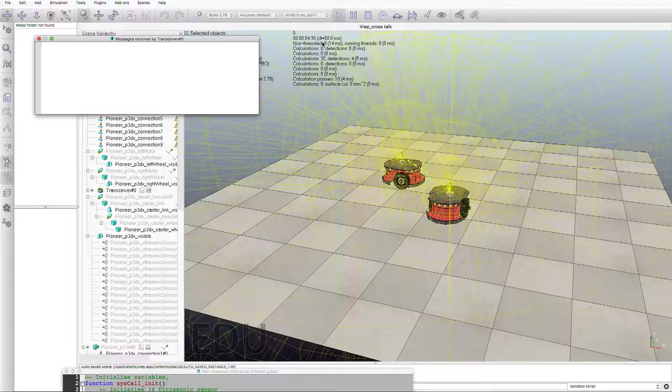There you are. There you are, that is the fun element. You can see that both the vehicles have dropped out of the screen, and that is the fun part.

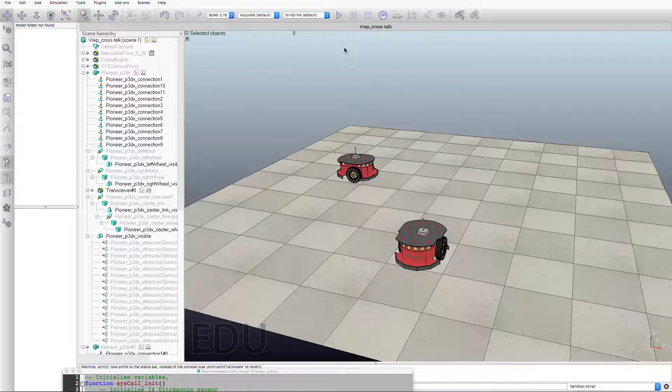So you saw that nice demonstration in a simulation environment. It was quite hilarious. The two-wheeled robots that you saw on either side just dropped off the platform. Clearly those situations were not handled in the simulator, and often it should not happen that when you put your algorithms in place, these autonomous cars should just drop off, go off the road, or drop off a cliff. So that is where the real trick is: how do you plan everything for your vehicle so that it moves in a coherent manner and is able to reach its destination.

So if you have seen the demonstration, you may also be wondering what that simulator is, and what it is doing.

So for that, I wanted you to get introduced to this simulation environment simulator called VREP. VREP stands for Virtual Robot Experimentation Platform, and this is essentially from a company called Coppelia Robotics.

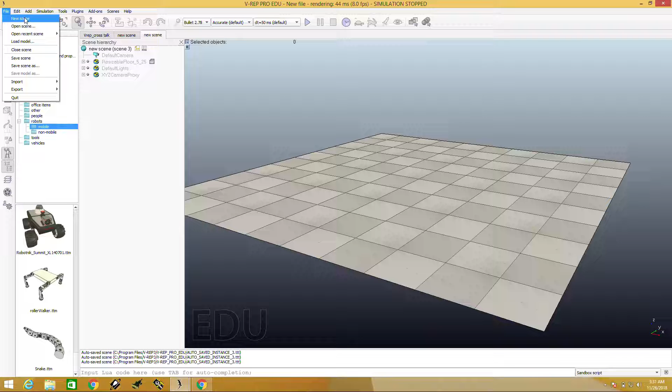So I am assuming that this screen you will get soon after you install it on your laptop, and all of that is set. Now what I suggest is you should first go and take a new sort of a scene, take a new scene.

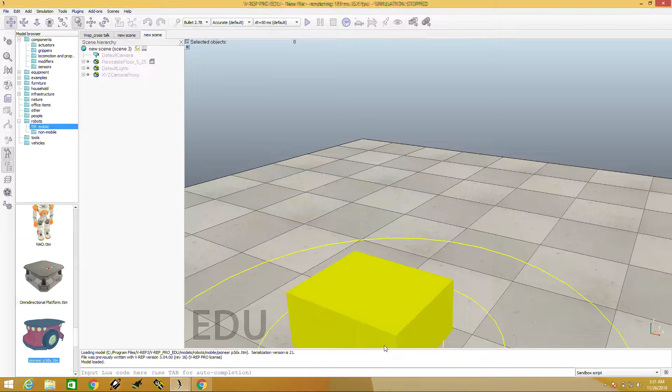So you are ready now, and you will go to the model browser and pick a mobile robot, which is perhaps called Pioneer. By the way, it is important to realize that if you see a Pioneer P3DX kind of robot, you can be more or less sure that you can physically buy a Pioneer.

Most of the models in VREP are essentially those components which are available as either robotic platforms, end effectors, sensors, and so on. So all these are nothing but software components. If you can't invest in a physical purchase of a Pioneer robot, install this VREP simulation software, and then you try out all the applications within that system.

Now look carefully, we want this scenario. Let me go back to the screen here, that will help you understand what is critically required. You have one path like this and another path like this. You want one robot to move in this direction and you want the other robot to move in this direction.

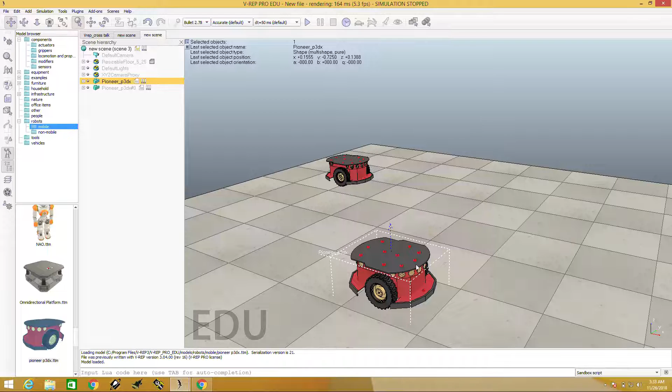Now go back to the VREP demonstration. You see that one robot appears to be good, it is moving and likely to come in this direction, but this robot requires a rotation, otherwise it would go parallel to this in the opposite direction.

Therefore, now you need to go to the tool browser and pick the rotate. You see the object there, you rotate it by 90 degrees. So now you have rotated it.

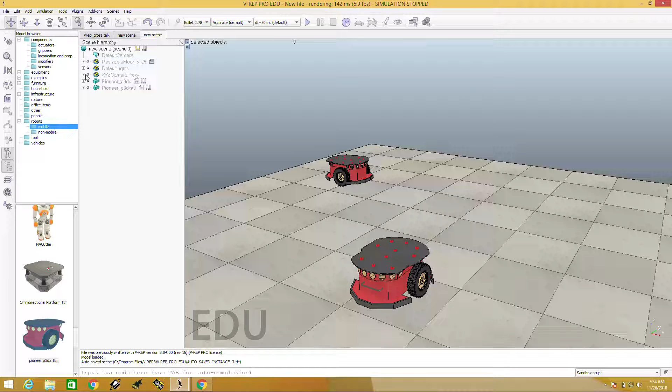Once you rotate it, let us understand what this Pioneer P3DX robot is all about. It actually integrates ultrasonic sensors. Let us go back and put this system here. You have a robotic platform, a set of ultrasonic sensors in the front and a set of ultrasonic sensors at the rear side.

There are 8 in the front: 3 plus 3 is 6, plus 1 is 7, plus 1 is 8. And then there are 8 on this side: 3, 4, 5, 6, 7, 8. So this is one part.

Then there is also a requirement. So we will also have to use the other part, which is essentially adding another component, the wireless transceiver. So let us put that wireless transceiver, go down and pick this wireless transceiver and associate it as part of this robot.

So essentially you can think of this as a parent, the robot as a parent and the transceiver as a child of this parent. This association is being done now. So let us complete this.

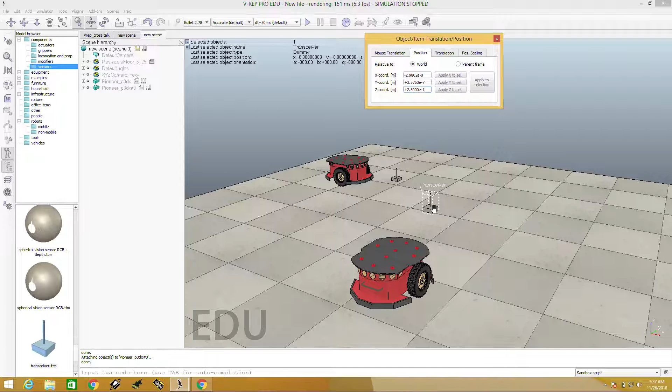So they are now part of one unit, and should we place it on top? Let us move it on top. Let us move them on top. They are now part of it, so there is one parent and one child, another parent and another child. That is good, and take that, and place it there.

Now look carefully at the Pioneer robot. You see on the front side the ultrasonic sensors that are shown, and behind are also a set of ultrasonic sensors. Now what we will do is essentially run an algorithm. What is actually happening?

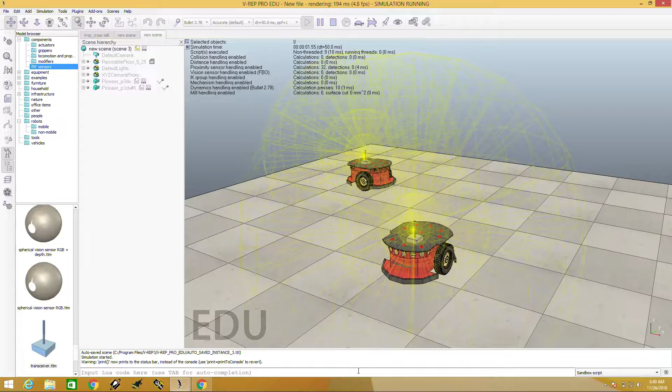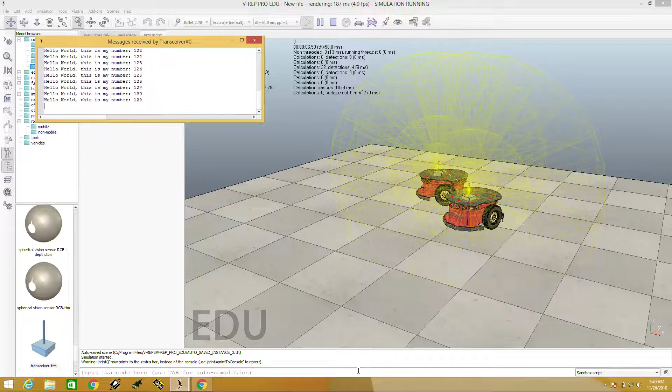You can see now that quite similar to the airplane example we took, no two planes can collide at cruising height or cruising altitude. They come extremely close, dangerously close, but decide to take two separate paths very intelligently and just move away from each other, perhaps changing their directions and also the altitude, so that they are not in the same plane anymore.

Two planes are not in the same plane, perhaps that is what the algorithm actually does. In this case, what is that algorithm? You can see on the left side there was a flash of 'hello world, this is my number 232', 'hello world, this is my number 233'. Why did this happen at all?

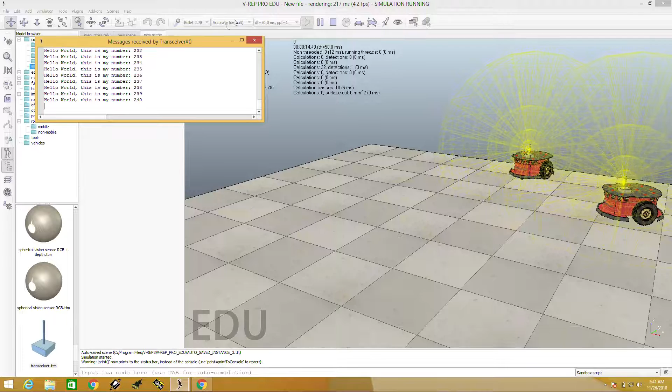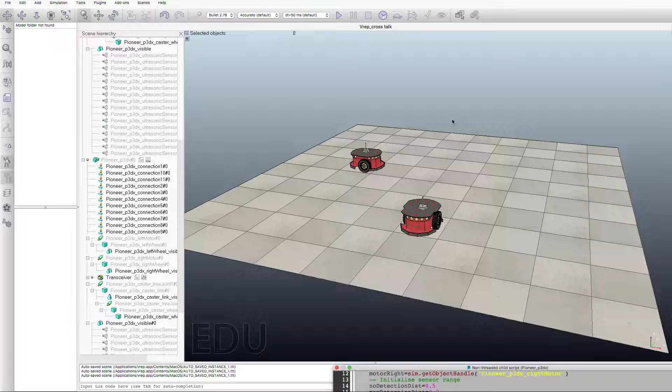Because transceivers were in range, and they realized that they are within range, but they did not know how close they are. So one part is being in range, the other is to actually estimate how close they are in terms of applying a sort of threshold, and once they come within a threshold distance, they need to kick in this algorithm and decide in a manner that they do not have a collision. This is the key point.